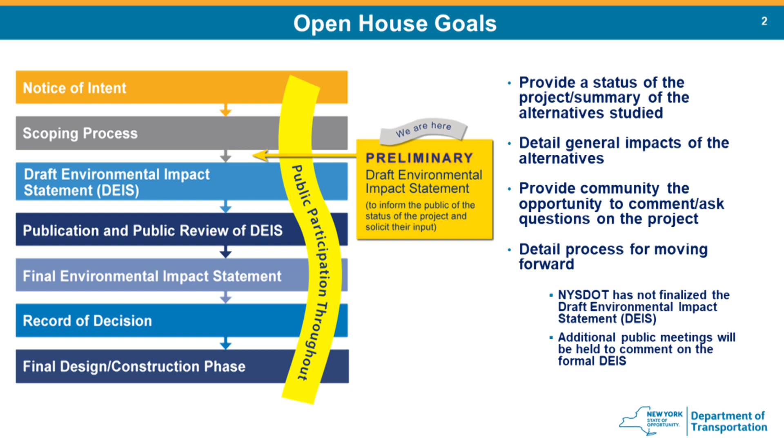The release of this preliminary DEIS affords us the opportunity to start discussing with you the potential impacts of each of these three build options. Through an open dialogue, it will help DOT mitigate impacts to our community. DOT has not finalized the DEIS, and we will hold additional public meetings to allow for your community input on the formal document once it is released.

I-81 is an international trade route which travels from Canada to Tennessee. As we all know here in Syracuse, it is a critical route that provides connections to other major interstates like Interstate 690, Interstate 481, and of course, Interstate 90, the thruway. But it also provides primary local access to downtown, to the University Hill area, to SU, to the hospitals, and to the neighborhoods. It is this connectivity that is essential to influence the livability, economic vitality, and sustainability of Central New York.

Our objectives have not changed. They remain the same today as they did previously. The New York State Department of Transportation needs to enhance safety within our transportation system. We will do that by fixing the structural deficiencies associated with our downtown bridges. We will add shoulders. We will lengthen on and off ramps. And we will correct a host of other non-standard features that exist today.

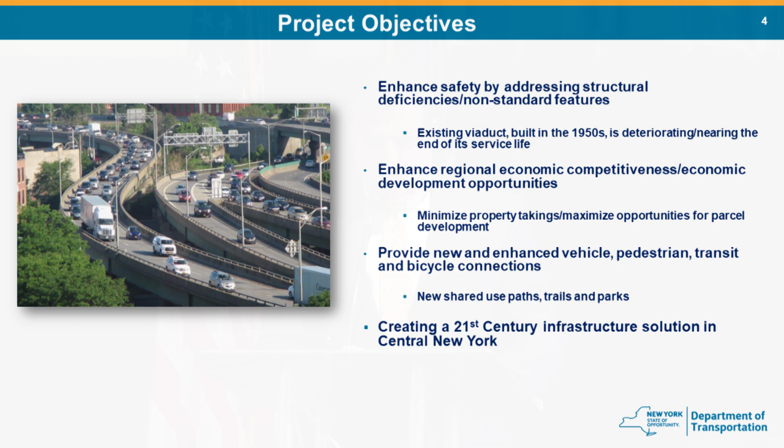This project will breathe new life into the city of Syracuse and central New York by increasing the regional economic competitiveness and economic development opportunities for residents and businesses. The project will provide new and enhanced vehicle, pedestrian, transit, and bicycle connections. DOT wants to build a 21st century infrastructure solution that the residents, motorists, and visitors deserve here in central New York.

I'm going to start by talking about the community grid alternative. The Department of Transportation continues to listen to central New York, and it has changed many components of the community grid alternative since our last major public open house meeting back in October 2016.

One of the more significant changes we are now recommending is that between I-81 at the northern interchange, I-81 481 here, and I-81 481 to the south, would be redesignated as Business Loop 81. I-481 would become new I-81 with multiple transportation upgrades.

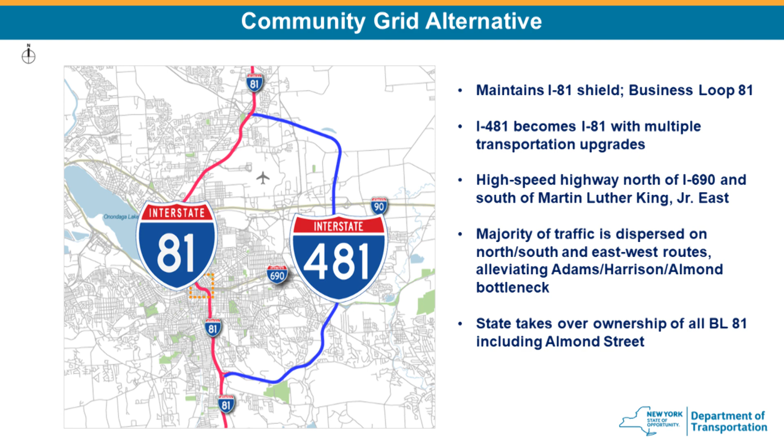This is similar to the way the highway functions today, with high speeds into and out of Syracuse. In a few slides, I will discuss that 1.4 mile section of viaduct that Business Loop 81 would replace in downtown.

I'm talking about that section south of I-690 and north of MLK Junior East. I will tell you how DOT will disperse north-south and east-west traffic in Syracuse to alleviate current bottlenecks, specifically at Almond and Adams, and at Almond and Harrison. New York State DOT would own the entire Business Loop 81 route and bear responsibility for its operation and maintenance.

I-81, as mentioned, would receive major highway improvements under the community grid alternative. DOT would reconstruct the two interchanges, to the north and to the south.

We would do that so motorists can travel at 65 miles per hour to the new 81. People coming in from the north would be able to maintain 65, and from the south they'd be able to maintain 65 on that corridor.

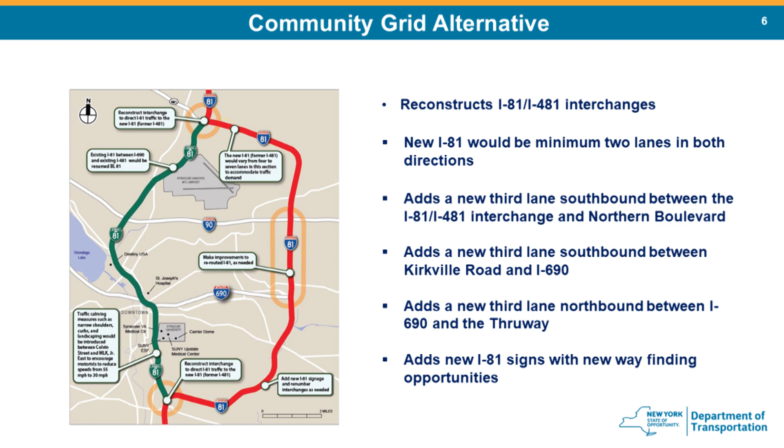We would have a minimum of 2 lanes in both directions, with upgrades to 3 lanes in certain sections. First, a 3rd lane southbound from the interchange up to Northern Boulevard. We'd also build a 3rd lane southbound from Kirkville Road to I-690, and a 3rd lane northbound from I-690 up to the thruway at I-90. New I-81 and Business Loop signs plus wayfinding upgrades would also occur.

I want to move to that downtown area of Business Loop 81 where the current 1.4 mile viaduct section exists. DOT would keep the 81 shield through Syracuse.

High-speed motorists coming from destinations south of Syracuse, like Lafayette, Tully, Binghamton, heading north, would transition to a 30-mile-per-hour speed at MLK Junior East, down by the dome area.

They would take Almond, which currently is under the viaduct today, up to Erie Boulevard and onto Pearl Street. Once they got back off from Pearl Street, that would return them to a high-speed facility heading north.

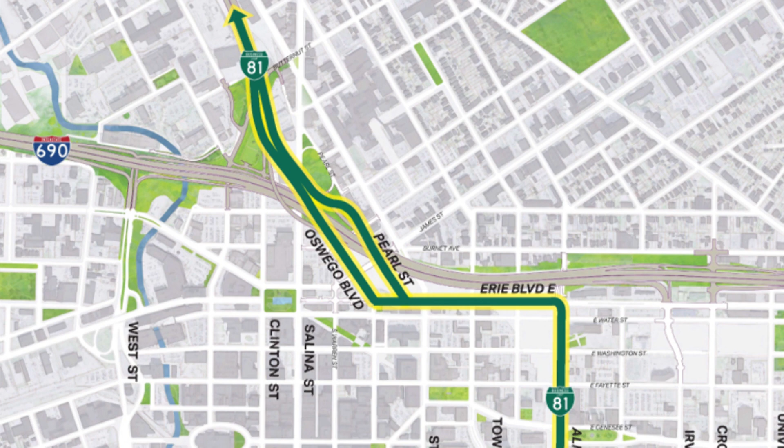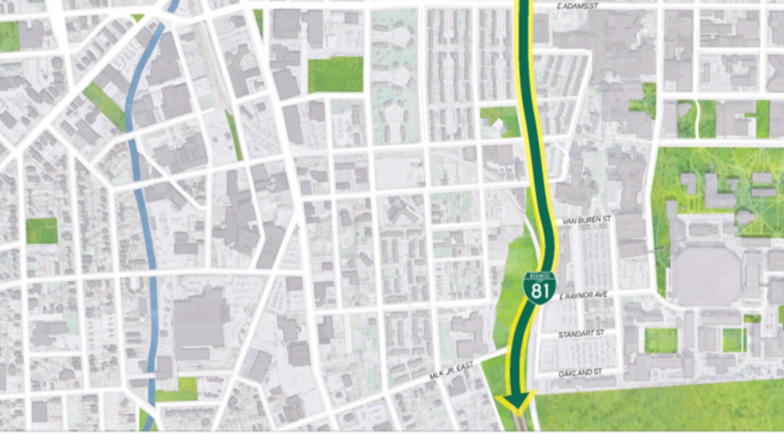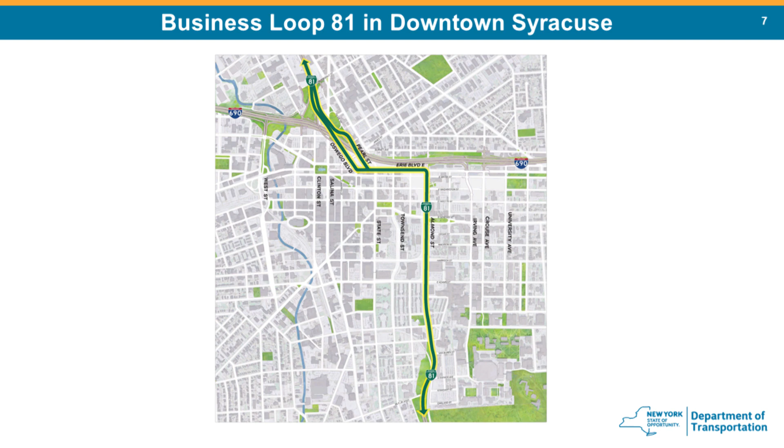The Business Loop 81 concept supports economic development by providing a consistent, simplified numbering system that would make it easier for travelers to find their way around and through Syracuse.

As mentioned earlier, DOT would own the Business Loop 81 corridor in its entirety. This includes the section in downtown Syracuse, and we will continue to work with the city and coordinate ownership with them.

The idea behind the community grid alternative, though, is much more than just the Business Loop 81. The community grid alternative looks to efficiently get people to where they want to go. There are numerous improvements to local streets that will disperse traffic and provide new ways to access the city from both Business Loop 81 as well as Interstate 690.

DOT will build new access points at Crouse, at Irving, and at Oswego Boulevard. This is being built for faster, more direct access to destinations downtown and the University Hill area. DOT will also maintain Clinton Street, the West Street interchange, and the Pearl Street on-ramp to disperse local traffic throughout the city.

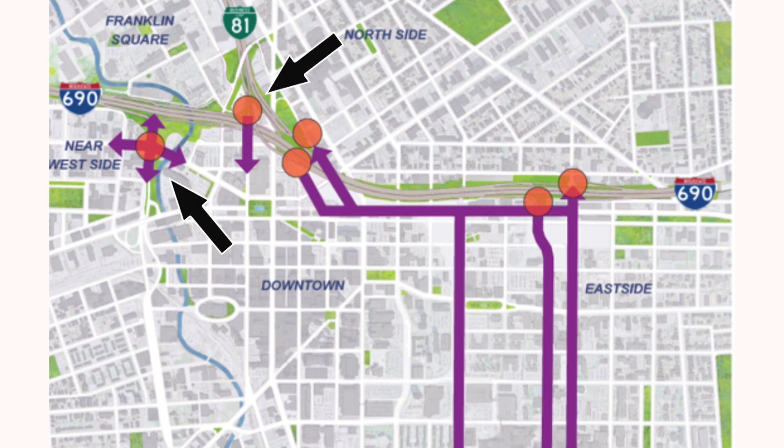Motorists living south of the city heading north would also see the grid activated by a number of transportation upgrades that DOT would like to do as part of the project.

By creating a new access point at MLK Jr. and Van Buren Street, we can improve access to the south side and University Hill from the south. DOT can alleviate the existing congestion and bottlenecks between Adams and Harrison along the Almond Street corridor.

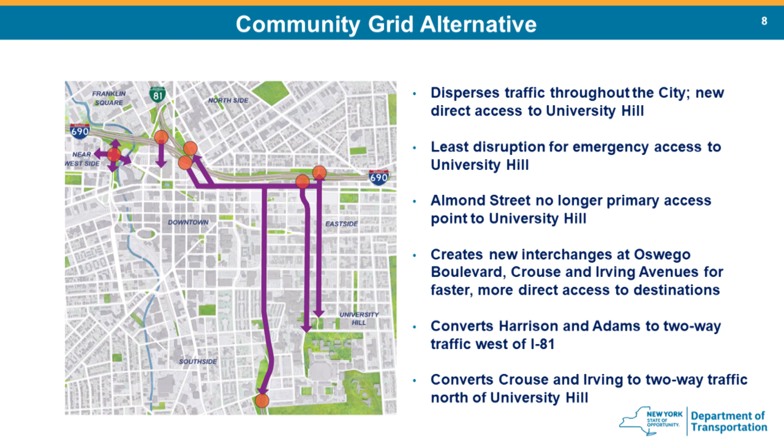The Department of Transportation will also convert many streets from one-ways to two-ways, including Crouse, Irving, Adams, and Harrison, to better connect neighborhoods and the community.

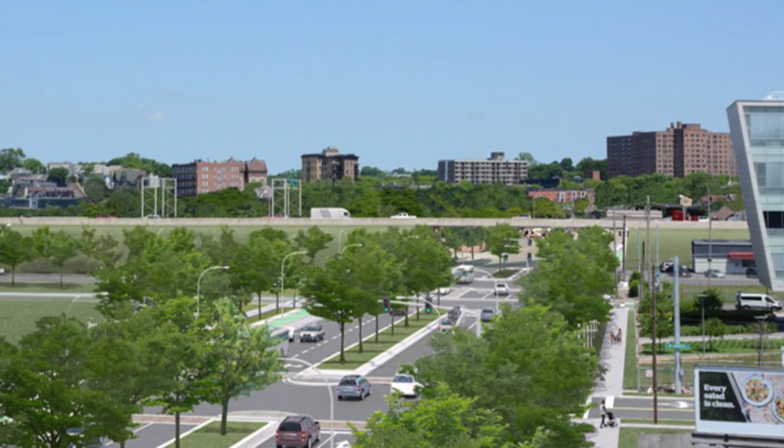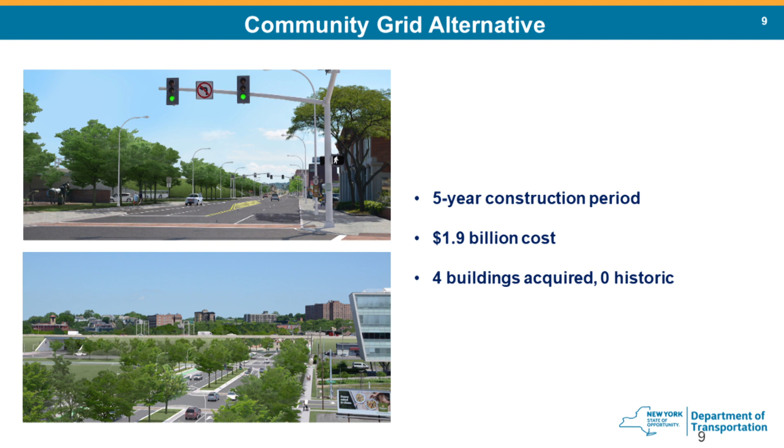The community grid alternative provides the greatest opportunities for pedestrian, bicycle, and transit enhancements to promote a livable, walkable community. It is projected to take 5 years to build and has a total cost of $1.9 billion. It requires the acquisition of 4 commercial buildings, of which none are historic.

I'm going to transition to the tunnel analysis that New York State DOT has been working on. In total, the Department of Transportation has analyzed 17 different tunnel solutions for the replacement of the I-81 Viaduct. The latest analysis was done on the orange tunnel concept. There are multiple displays in the ballroom related to the orange tunnel concept.

This concept was recommended for further study back in December of 2017. The tunnel would carry 2 through lanes in each direction, with tunnel portals just south of James Street on the north side, and a southern portal just south of MLK East Junior. Once in the tunnel, there would be no exits downtown. The use of ventilation buildings as shown in the top picture, this one's from Seattle, and continuous treatment of the saline groundwater would be required.

4 streets would be severed as part of the tunnel concept as it returns back to the surface. Those streets include Washington Street, Jackson, Burt, and Van Buren at Almond Street.

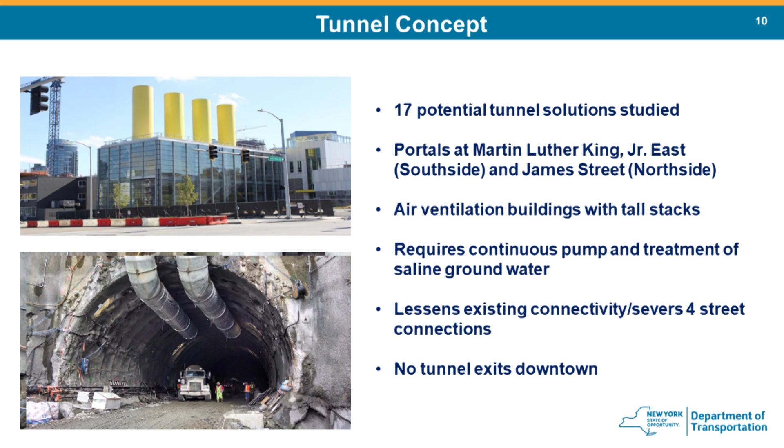The Orange Tunnel concept is projected to take 11 years to build. It has a total cost that is more than double the viaduct and community grid solutions at $4.9 billion. The tunnel requires operations 24 hours a day, 7 days a week, 365 days a year, and that estimated cost is estimated to cost the state $16.5 million per year. The Orange Tunnel solution acquires 17 buildings, 9 of which are historic.

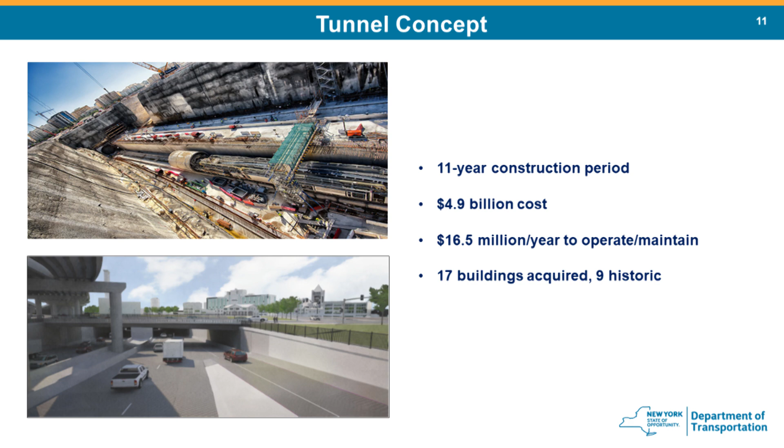Transitioning to the viaduct replacement. The Department of Transportation has analyzed 5 different viaduct replacement options, which retain similar access points to downtown Syracuse and the University Hill area. Construction would include the 2 missing connections between I-81 and I-690 that are today served by Bear and Hiawatha. I am referring to building the I-81 southbound to I-690 westbound and the I-690 eastbound to I-81 northbound.

Under this option, we would have no enhancements to the Interstate 481 corridor. The Department of Transportation would build the new viaduct wider and higher to address many of the geometric issues that we have today. But that would limit the economic development opportunities as the new viaduct would have a larger footprint.

Construction is anticipated to take 6 years, has a total cost of $2.2 billion, and would require acquisition of 24 buildings, 10 of which are historic.

As you can see from the comparison of alternatives, the community grid has the shortest construction duration. It acquires the lowest number of buildings, and none of the 4 to be acquired are historic or residential. The community grid has the lowest costs. It reconnects neighborhoods and supports economic development. The community grid alternative enhances safety and supports public health across all policies.